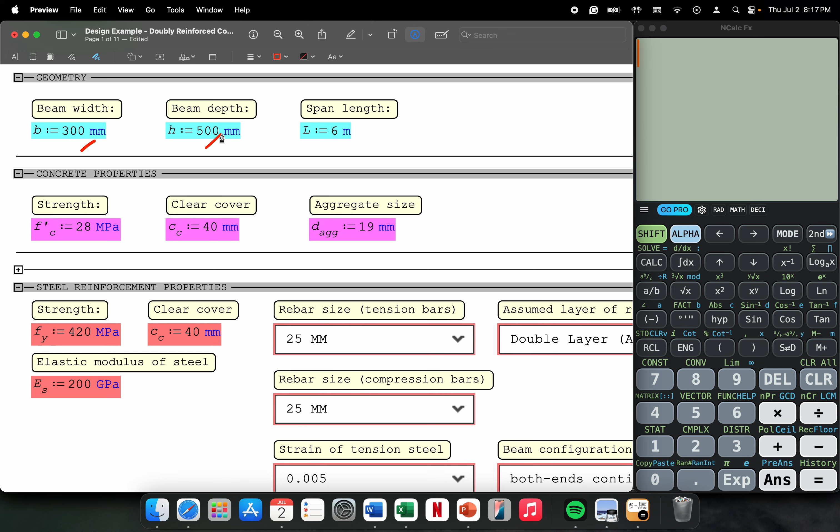So given na yung factored bending moment natin is 400 kilonewton meters. And for our geometry, we have our beam width na 300 millimeters, depth is 500 millimeters, span length na 6 meters. For our concrete properties, we have our FC prime here to be 28 megapascal, our clear concrete cover na 40 millimeters, and our aggregate size na 19 millimeters.

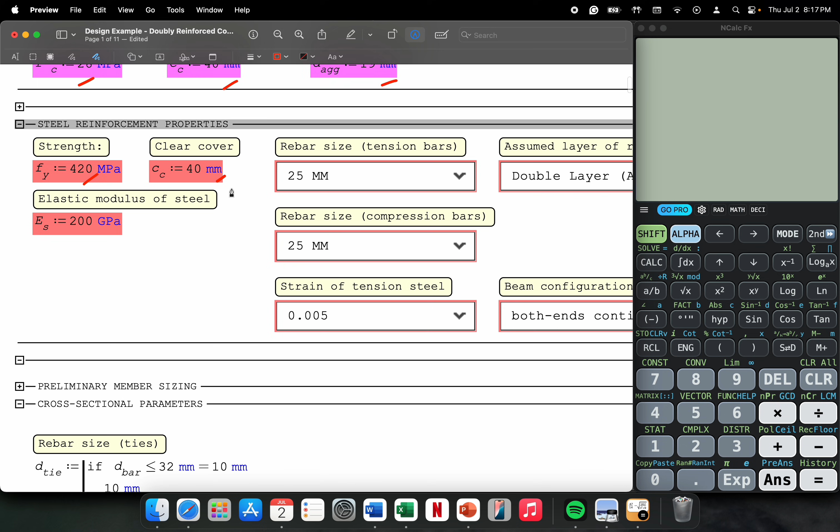For our steel reinforcement properties, our Fy or the yield strength is equivalent to 420 megapascals. And for our clear concrete cover, 40 millimeters. For our elastic modulus, we have 200 gigapascal. And for our rebar size, meron tayong tension bars dito na 25 mm yung diameter. For our compression bars naman is 25 millimeters. And we're going to make use of the strain sa ating tension steel to be equivalent to 0.005.

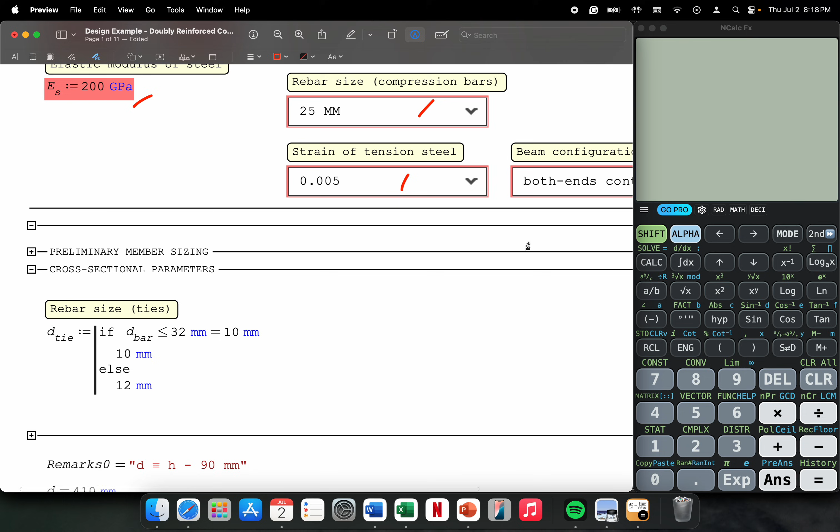And for the assumed layers ng ating rebars, we're going to make use of the equation for the double layer, yung approximate equation para ma-solve natin yung effective depth, which is equivalent to H minus 90 millimeters. So for our beam configurations, nakalagay din dito na both end continuous. Supposedly, meron pa tayong preliminary na sizing ng beam, but we're going to skip it. We're going to proceed na lang to the cross-sectional parameters.

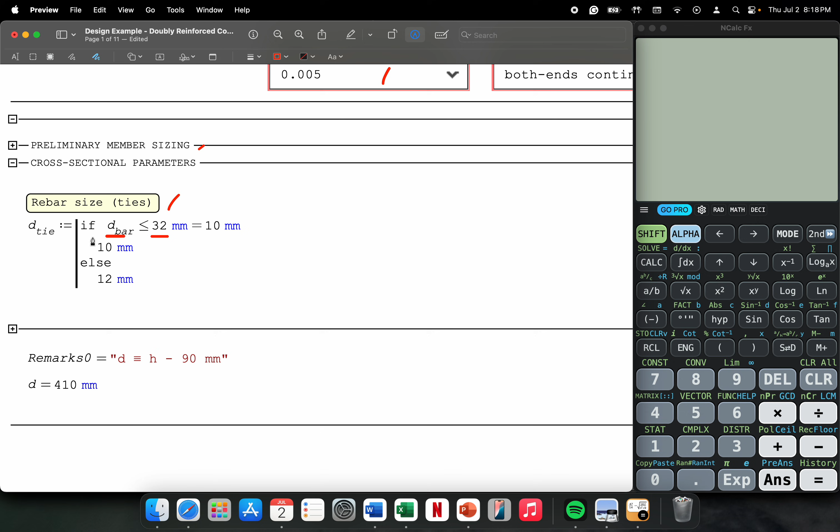So first na isa-solve natin dito is yung rebar size para sa ating mga stirrups. Since yung diameter ng ating mga bars is 25 millimeters, it is less than 32 mm, meaning itong 10 millimeters ang magiging diameter ng ating stirrups.

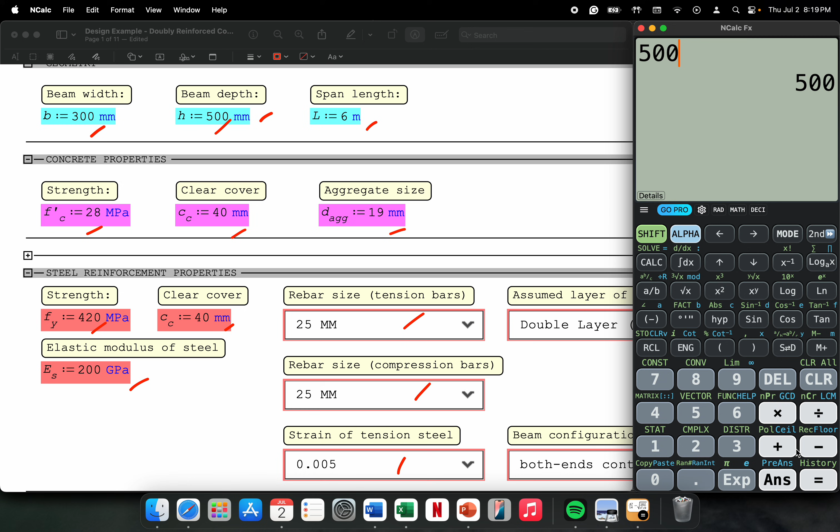And after that is to solve for our effective depth. So we're going to make use of this equation, h minus 90 millimeters. So isosolve natin. Yung h natin is, we have here 500. So 500 minus 90, we get a value of 410. So ito ngayon yung ating effective depth na gagamitin sa pag-design ng ating beam.

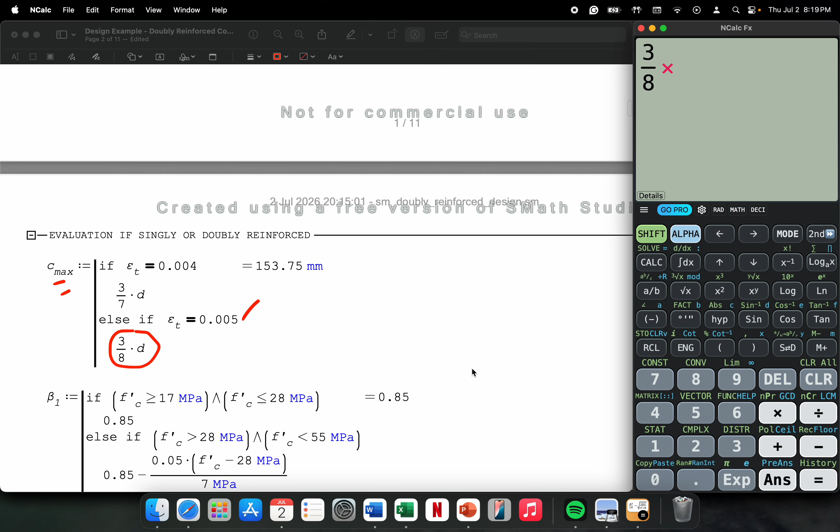After nito is yung pag-evaluate whether yung beam is i-design ba natin ito na singly reinforced or doubly na reinforced. So based sa problem, we're going to make use of the 0.005 na strain sa ating extreme na tension steel. So we're going to make use of 3 all over 8 times D para masolve natin yung Cmax. So using our calculator here, 3 all over 8 times yung D, nakakasolve lang natin, 410. So we have here 153.75.

After that is to solve for our beta factor. So based sa problem, yung FC prime natin ay 28. So therefore, yung beta factor natin is equivalent to 0.85.

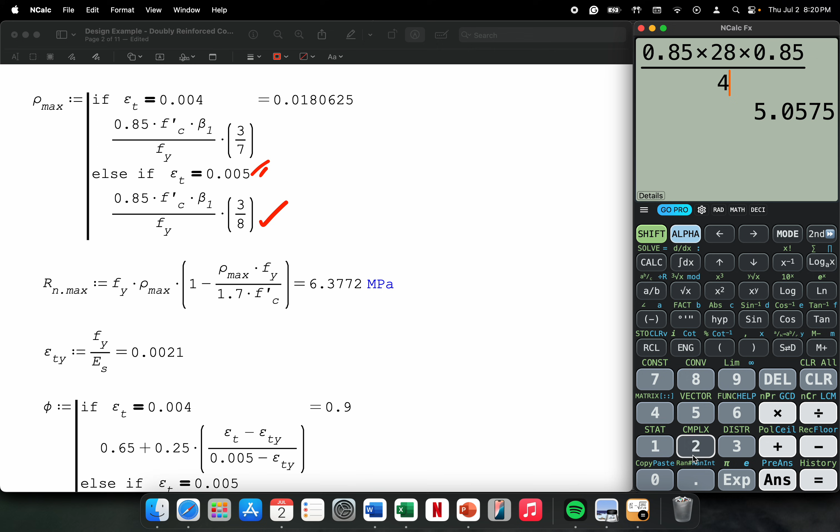After that is to solve for our maximum steel ratio. Since yung strain ng extreme tension steel na gagamitin natin is 0.005, therefore we're going to make use of this equation. So we have here 0.85 times ang FC prime natin na 28 times yung beta natin na 0.85 divided by yung Fy, which is 420, times yung factor na 3 all over 8. So masasolve natin is 0.0180625.

After that is to solve for the coefficient of resistance, considering na na-maximize natin yung steel reinforcement. So ito yung formula or yung equation natin. So, yung Fy is 420 times yung rho max natin, which is 0.0180625, times 1 minus 0.0180625 times yung Fy na 420, then we're going to divide it by 1.7 times yung Fc prime natin na 28. So yung masasolve natin dito is 6.3772 megapascals.

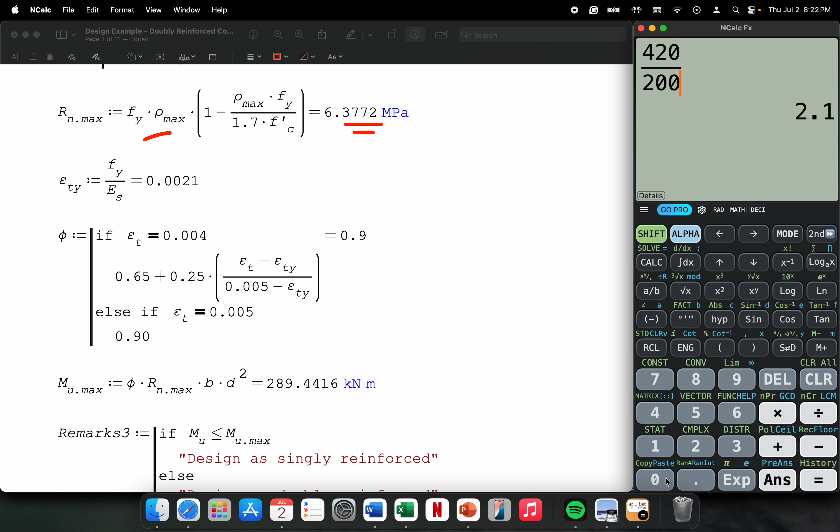After that is to solve for the strain ng ating yung yield strain ng ating steel reinforcement. So this is equivalent to Fy all over elastic modulus ng ating steel. So ang Fy natin is 420, then yung elastic modulus naman natin is 200,000. So this is equivalent to 0.0021.

After nito is isosolve din natin yung strength reduction factor. Since yung strain natin na ginamit is 0.005, meaning that is tension controlled. So therefore, 0.9 yung magiging value for our strength reduction factor.

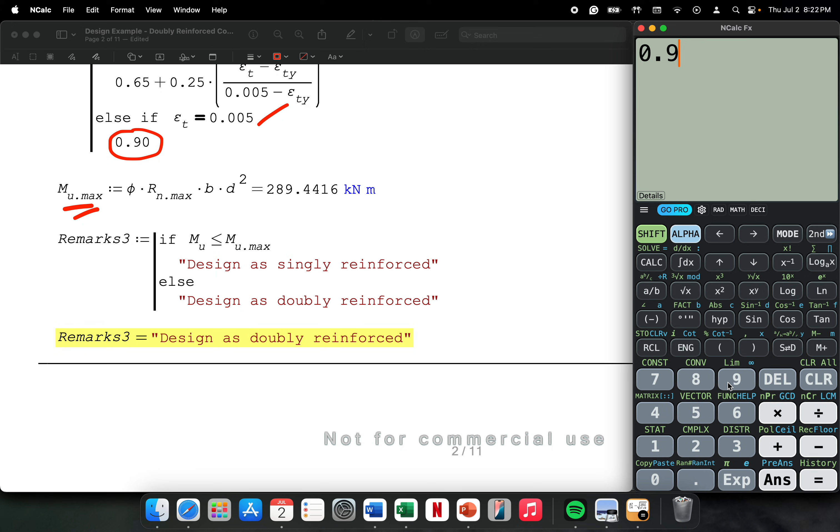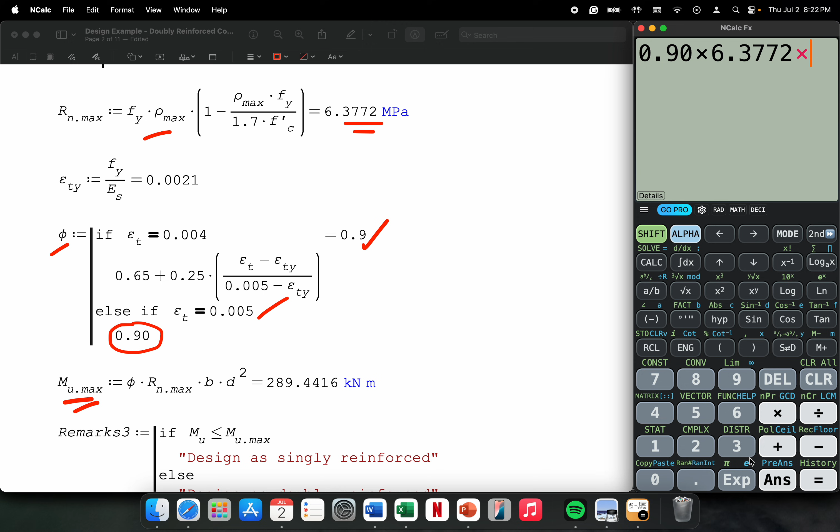After that is to solve for our maximum na ultimate moment. So this is equivalent to our phi, which is equivalent to 0.9 times yung Rn max, which is 6.3772, times yung B natin na 300, times yung D, which is 410.

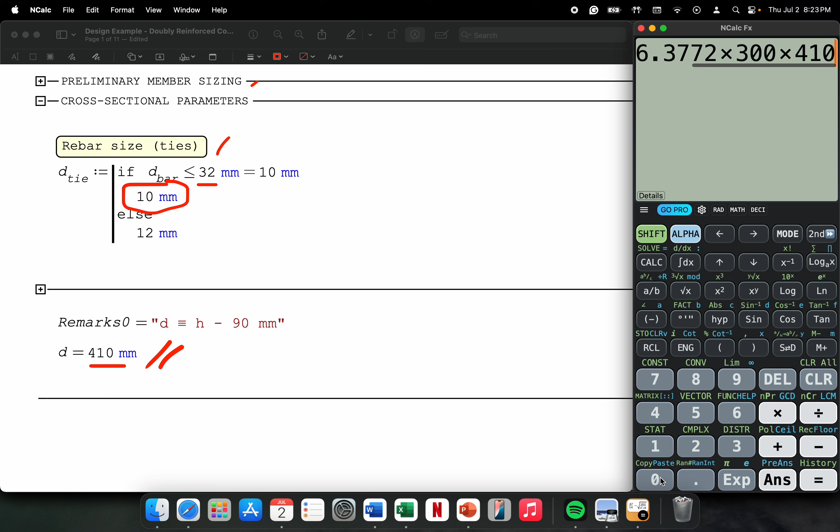Then is squared natin. So yung makukuha nating value dito is a large na value kasi yung unit nito is naka-Newton times millimeter. So we're going to divide this by 10 to the power of 6, para ito na ngayon yung value in kilonewton meters. So we have 289.4419764.

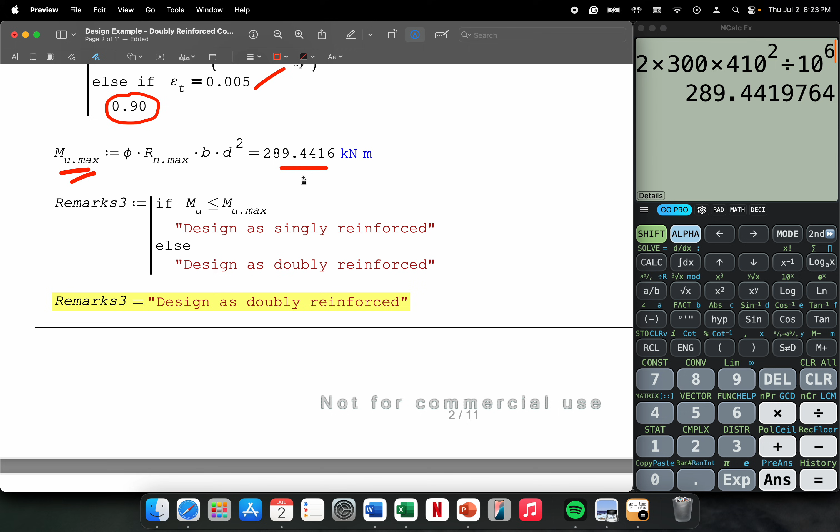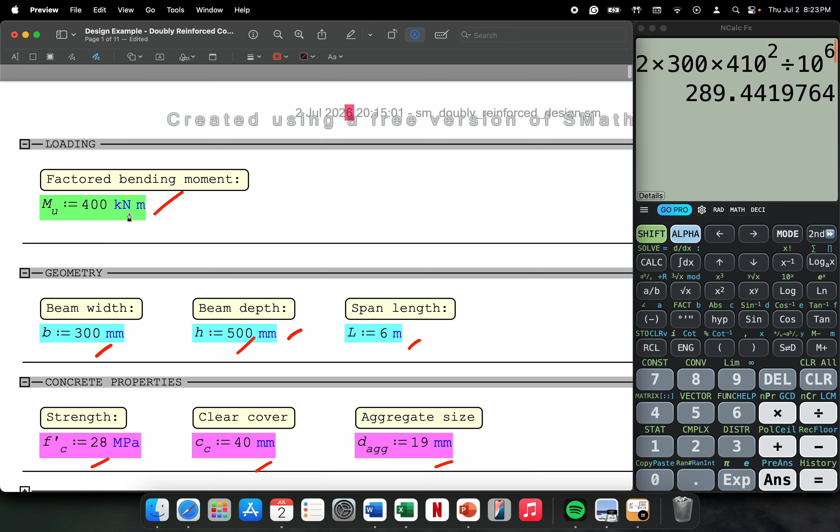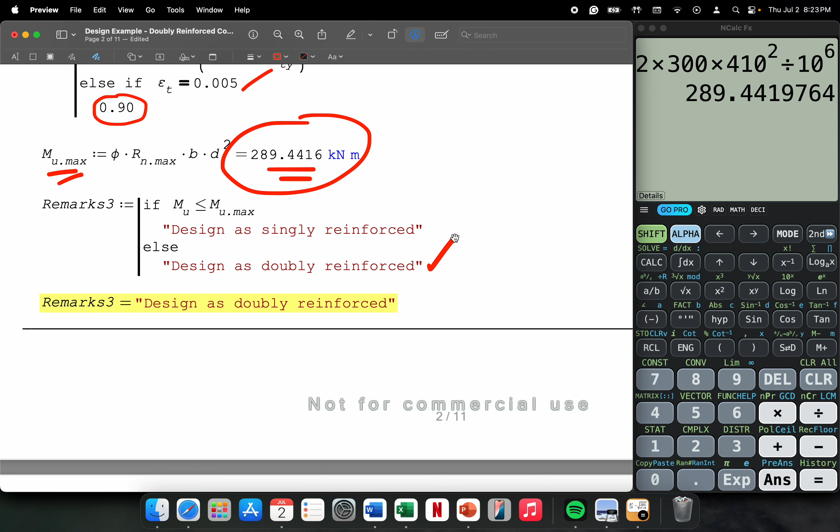After that, i-compare natin ito sa ating MU. So ito yung MU max, 289. Pero yung Mu natin is 400. Now, since yung Mu natin is greater than our MU max, therefore, we're going to design it as doubly reinforced. So after that, we're going now to proceed sa ating design calculation.

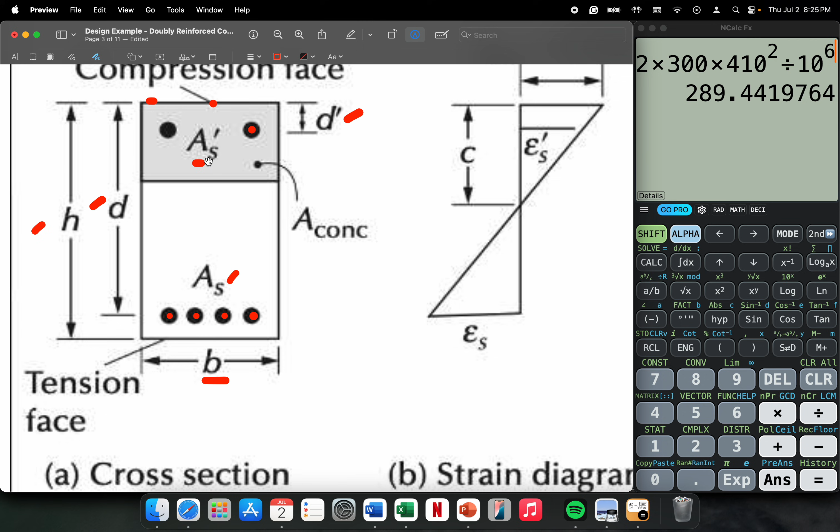And then, another is itong D prime. Itong D prime naman, ito yung location ng mga compression bars from the extreme fiber ng ating concrete sa compression na side papunta sa centroid. Yan yung D prime. And then we have two types of areas dito. Una is yung AS, meaning nito, ito yung total na area ng steel ng ating tension bars. Tsaka yung AS prime naman, ito naman yung total area ng ating compression bars.

So next na illustration is yung tinatawag nating strain diagram. So same pa rin from this point to this point here, yung dimension nito is 0.003. Ito yung strain ng ating concrete, upper limit na strain ng ating concrete base sa NSCP. And then we have the strain sa ating steel sa tension, epsilon sub s. Then since meron na tayong compression bars dito, of course meron din tayong epsilon s prime, which is located from this point here papunta dito.

So if we're going to check here our dimensions, yung location nito is D prime from the extreme fiber ng ating concrete. Then yung C natin, same pa rin, ito yung location ng ating neutral axis. So yan yung ating strain diagram.

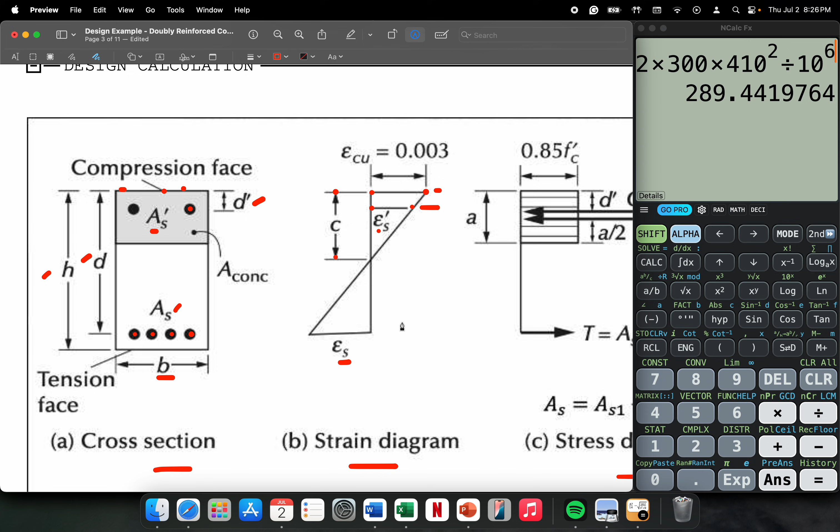And then another na diagram is itong tinatawag nating stress na diagram. So, di ba sa singly reinforced na concrete, meron lang tayong dalawa na mga forces. We have our tensile force sa ating tension bars and we have the compressive force ng ating concrete na block, which is equivalent to 0.85 FC prime AB. Sa doubly reinforced, since meron tayong mga compression bars, meaning meron din tayong dyan, additional na compressive force, which is taken as CS prime. Ito na ngayon yung parang resultant force doon sa compression bars natin na madadagdag dito sa C sub C or compressive force ng ating compression block.

So for the equations, itong T dito, ito yung tensile force sa ating tension bars. This is still equivalent to AS times our Fy. And then yung C sub C, ito naman yung ating compressive force sa ating compression block. This is still equivalent to 0.85 FC prime AB. So same pa rin, 0.85 FC prime yung magnitude ng stress, tsaka A times B naman yung area of contact, itong naka-gray.

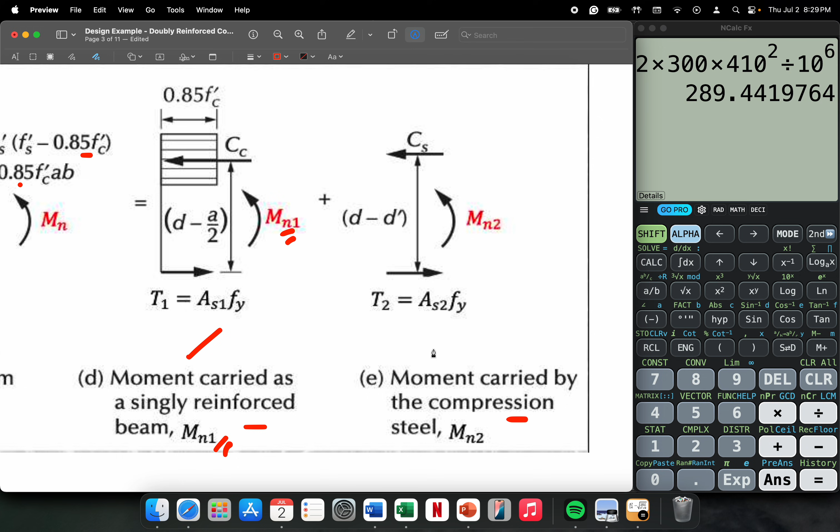So, para ma-analyze natin itong stress diagram, hatiin natin ito into dalawa. Yung first na diagram, ito yung moment na carried as singly reinforced na beam, yung MN1. Tapos, pangalawa naman is itong moment carried by the compression steel na MN2. So meaning, para masolve natin yung nominal moment dito, dapat masolve muna natin yung MN1 tsaka MN2.

So dito muna tayo sa moment carried as singly reinforced beam. Meaning nito, we're going to analyze yung moment as a singly reinforced na beam considering na ma-maximize natin yung steel reinforcement. So in here, meron tayong dalawang mga forces dito. We have our T1 tsaka yung C sub C.

So yung T sub 1 natin, this is equivalent to AS1 times Fy. Yung AS1, this is equivalent to rho max times BD. At yung C sub C naman, same pa rin, ito yung 0.85 FC prime AB. And the distance, yung moment arm between the two, is taken to be D minus A all over 2.

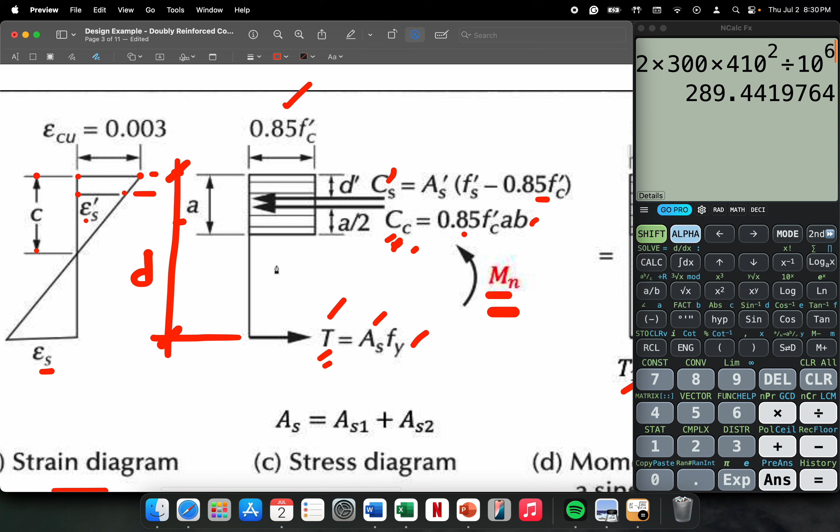So bakit naging D minus A all over 2? Kasi yung location ng ating tension bar, papunta dito sa extreme fiber ng ating concrete sa compression, this is taken to be yung D natin. And then yung ating C sub C, yung location nito is nasa centroid ng ating compression block with which naka-gray.

Since rectangular yung shape niya, meaning nasa gitna yung centroid. So meaning yung location nito from the extreme fiber ng ating concrete sa compression side is taken to be A all over 2. So yung remaining na ngayon, distance from this point hanggang dyan, is taken to be D minus A all over 2. Kaya meron tayong equation dito na D minus A all over 2.

Sa moment naman carried by the compression steel, dalawa pa rin yung mga forces dito. We have our T sub 2 tsaka yung C sub S. Yung T sub 2 natin, this is equivalent to AS2 times yung Fy. Tsaka yung C sub S naman, this is equivalent to AS prime times Fs prime minus 0.85 Fc prime.

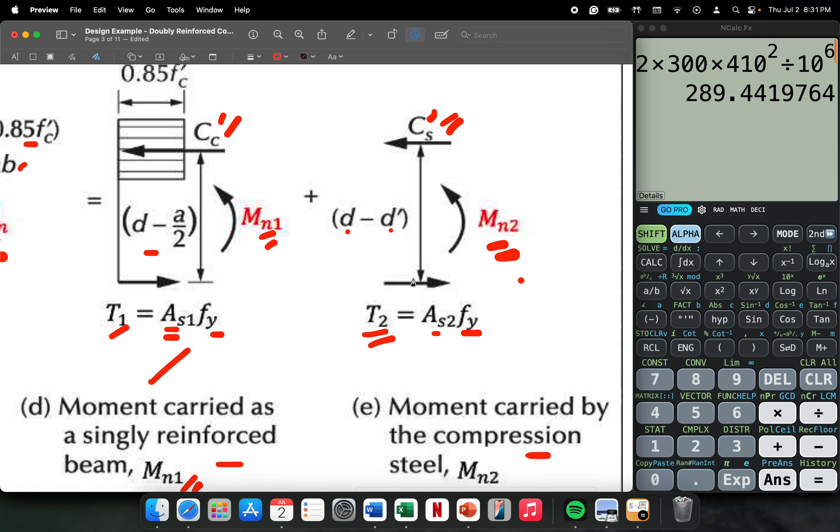Magdededuct lang tayo ng 0.85 Fc prime sakali na yung D prime is within doon sa A. So, next naman is yung moment arm or distance between the T sub 2 tsaka yung C sub S. This is taken to be D minus D prime. So, the question is why?

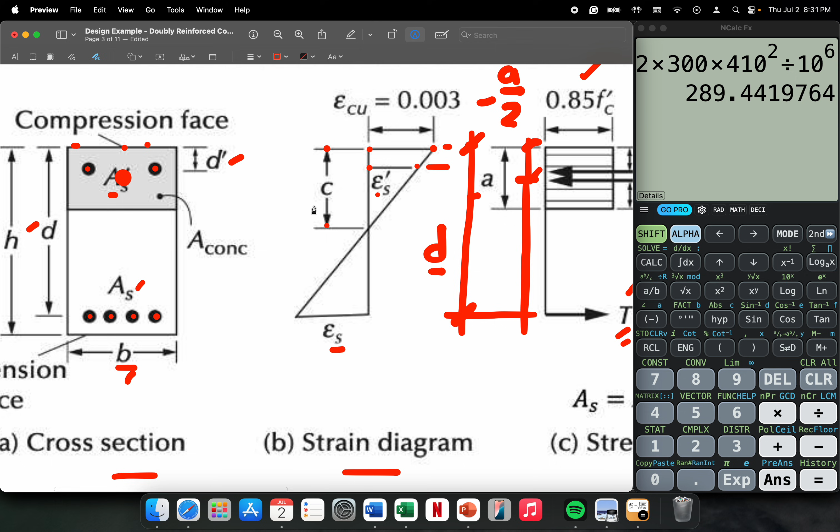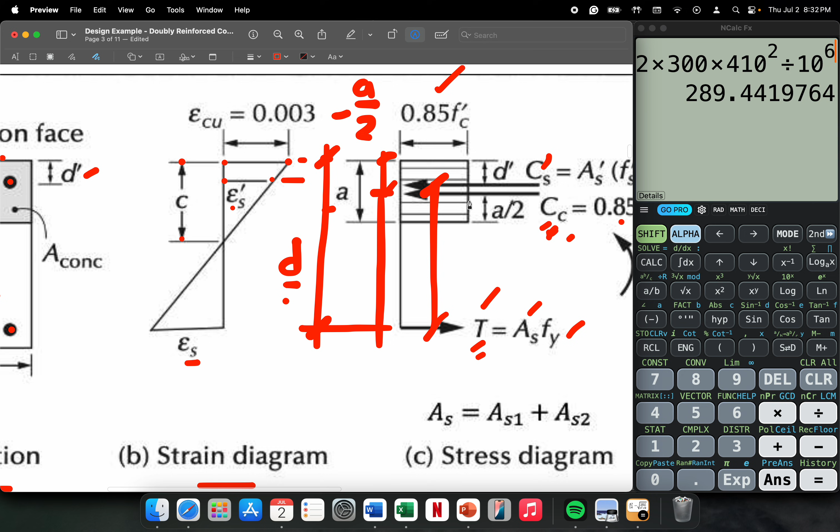Kasi yung ating CS prime, yung location nito is distance D prime from the extreme fiber ng ating concrete. So, if that will be the case, yung remaining natin na distance dito hanggang dito sa ating tension na force, this is taken to be D minus D prime. So that's why D minus D prime yung ating distance dito.

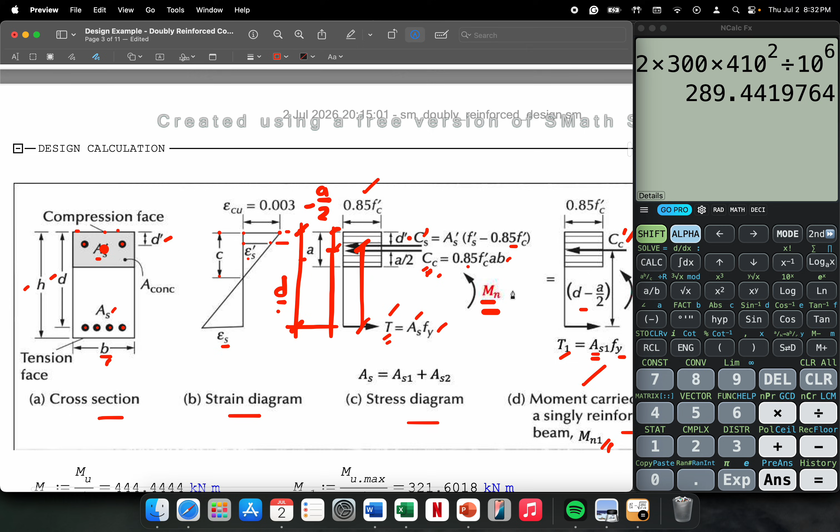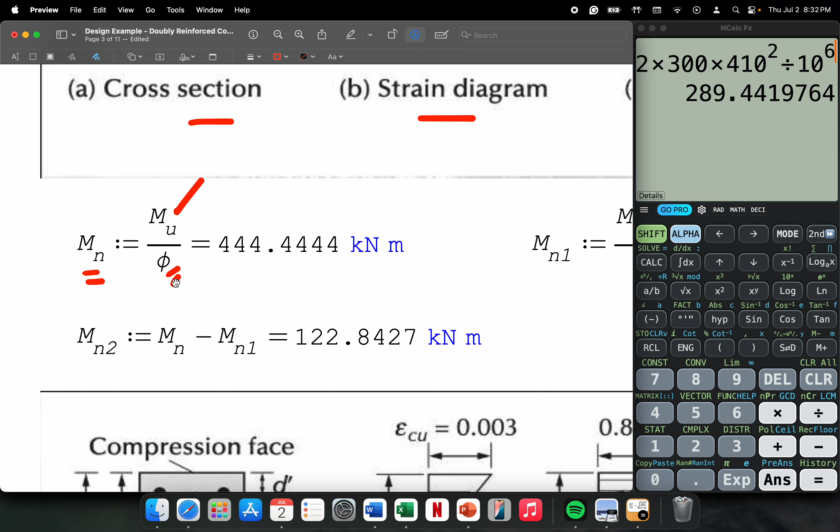So sa pag-design, ito yung first na gagawin natin. First is solve muna natin yung nominal moment. Di ba meron na tayong factored moment na given sa problem. I-divide na lang natin to ng strength reduction factor. Since we had assumed kanina na yung extreme tension steel natin is equivalent to 0.005, therefore, yung strength reduction factor na gagamitin natin is 0.9.

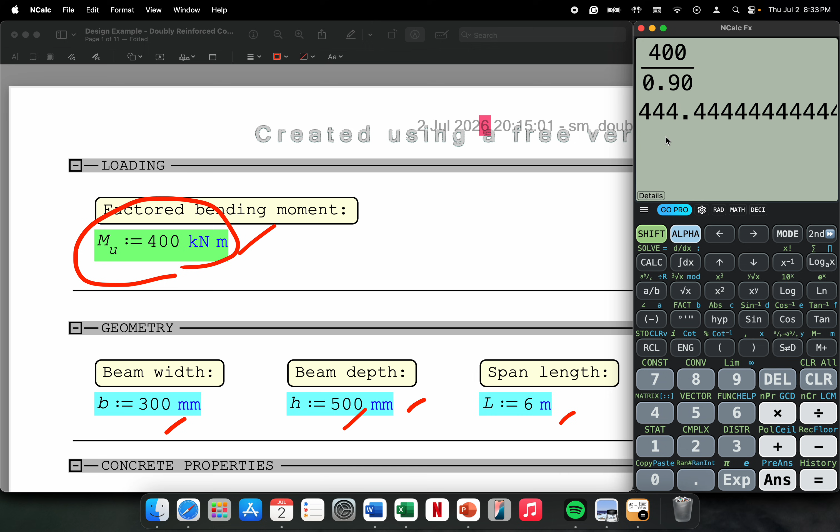So, ilan ba yung Mu natin? We have 400 divided by yung phi natin na 0.9. So, we'll get 444.44. Ito na ngayon yung ating nominal moment.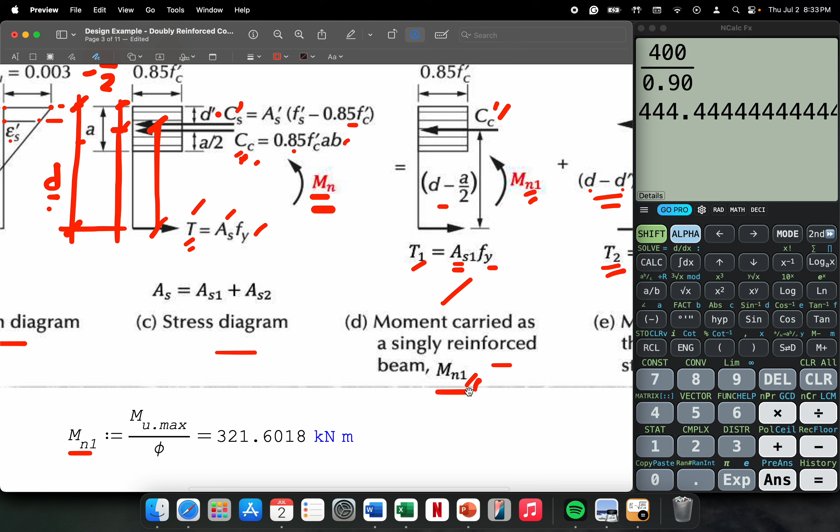Then, after that is to solve for our MN1. Dito tayo focus na diagram. This is the moment carried as singly reinforced beam. Take note, this is yung consideration dito sa MN1, kumbaga, na-maximize natin yung steel reinforcement. So, that's why yung MN1 natin dito, this is equivalent to MU max divided by yung phi na 0.9.

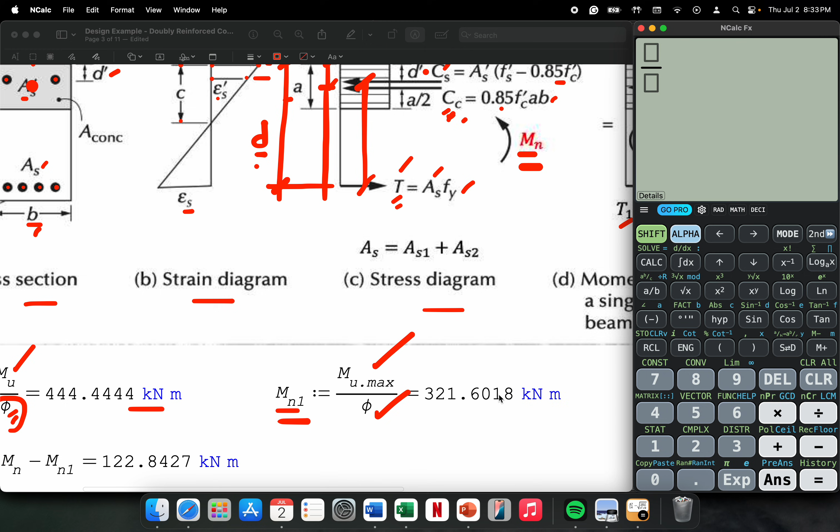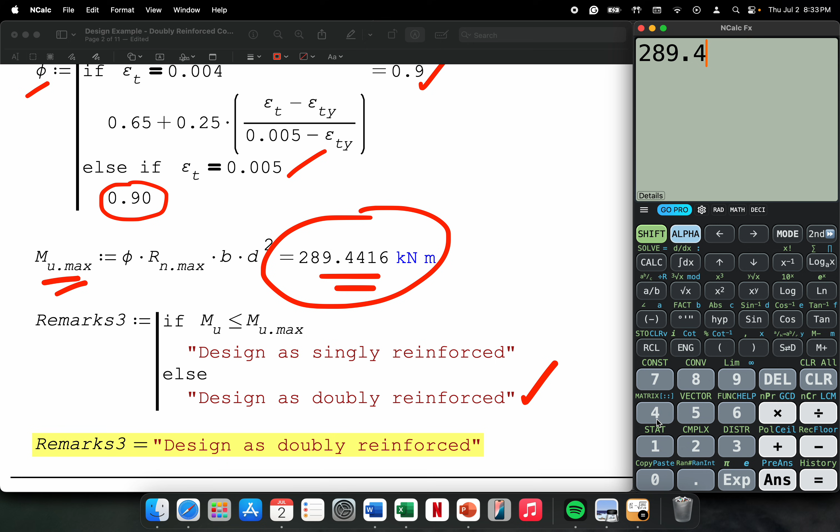So, yung MU max natin na nasolve kanina, that is equivalent to 289.4416. I-divide natin ito sa 0.9. So, yung masolve natin is 321.6018.

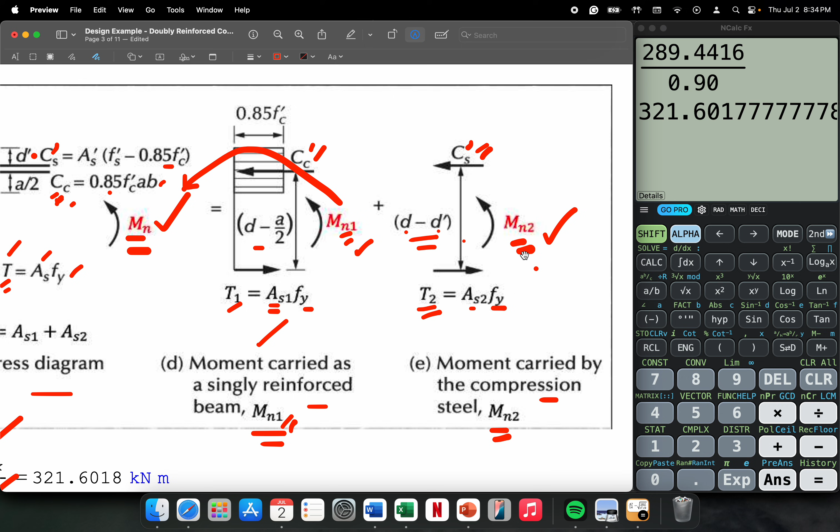After nito, we're going to solve na ngayon for our MN2. Paano natin masolve yung MN2? Take note, yung MN, this is equivalent to MN1 plus MN2. So, para masolve natin yung MN2, i-transpose natin yung MN1 on the other side of our equation. So, MN2 ngayon will now be equivalent to MN minus MN1.

So, yung MN natin is 444.444 minus yung MN1 natin na 321.6018. So, yung masasolve natin na MN2 is equivalent to 122.8427 kilonewton meter.